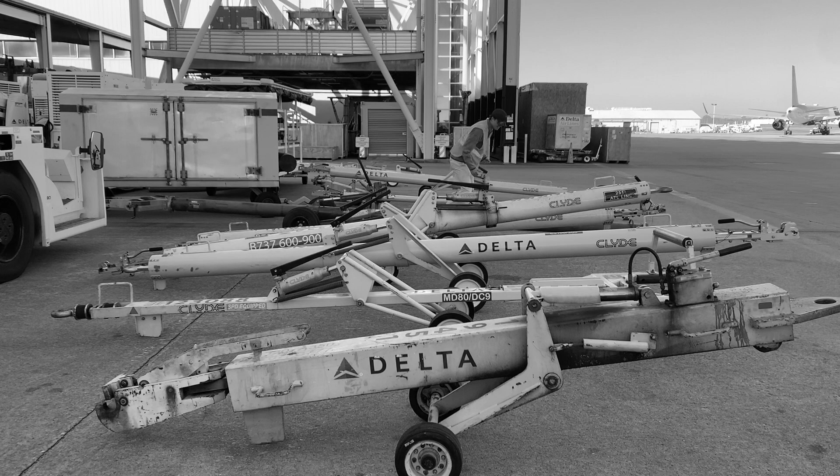Don't you hate it when you just have too many options? Look at how difficult it can be for a Delta operator to find just the right tow bar. Our team, the Total Package, plans to solve this predicament for Delta and their tow bar inventory.

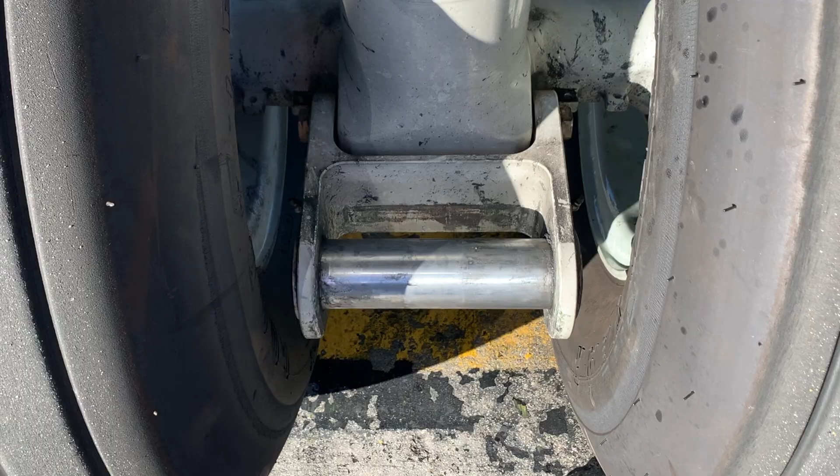While traveling, have you ever wondered how that massive airplane backs out of the terminal? You can thank an aircraft tow bar for helping you on your way. Shown here is the tow lug, located on the majority of Delta's fleet. Delta uses a variety of tow bars to connect to this part of the aircraft and successfully move it away from the gate and onto the runway.

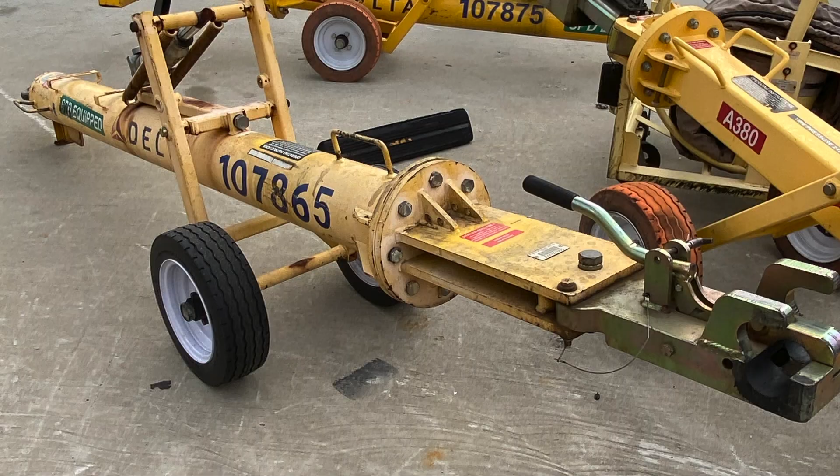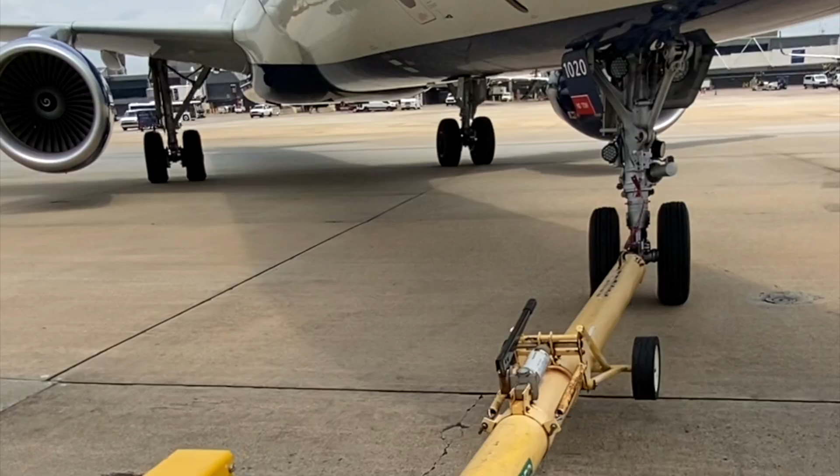Shown here is an example of a tow bar that Delta currently uses. On the left side of the image is the tow bar body, which attaches to a pushback tractor. Here you can see the tow bar head, which attaches to the tow lug on the aircraft. Together, they allow the pushback tractor to push the aircraft onto the runway and towards its destination.

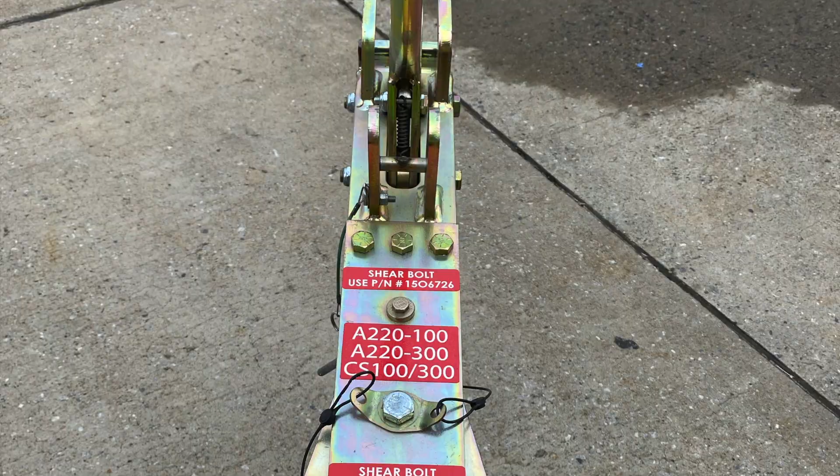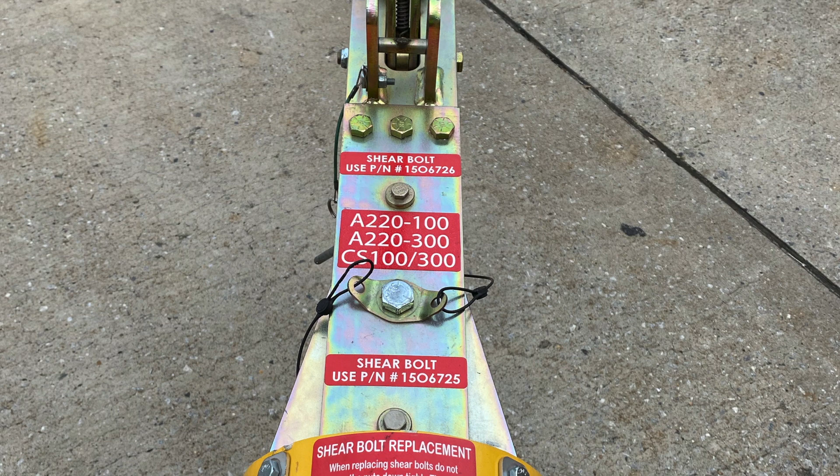At the end of the pushback, the operator disconnects the tow bar head from the lug, and the plane is on its way. One key feature of the tow bar is that it has a safety mechanism to prevent damage to the aircraft. This is currently accomplished by shear pins, which are connected to the tow bar and are designed to break when too much force is applied to the plane.

Because each aircraft model is unique, there are approximately 12 different tow bar styles that the ground support team can choose before pushing the aircraft. This creates confusion, which can lead to an operator choosing the wrong tow bar, which can then cause damage to the plane and delays for the passengers.

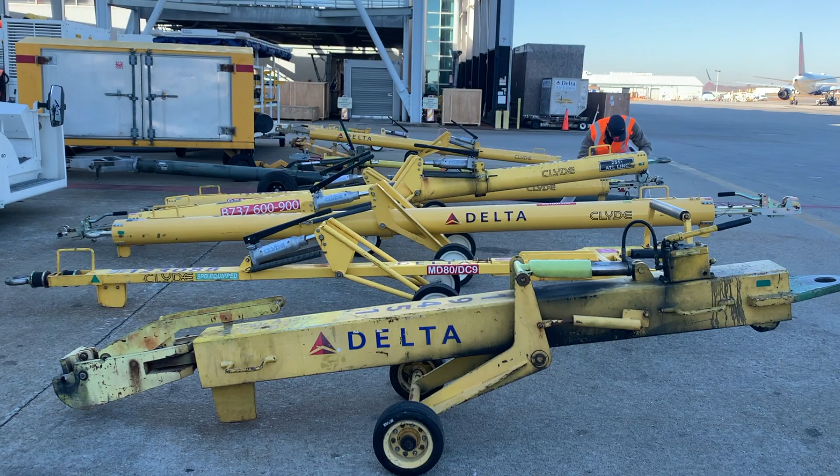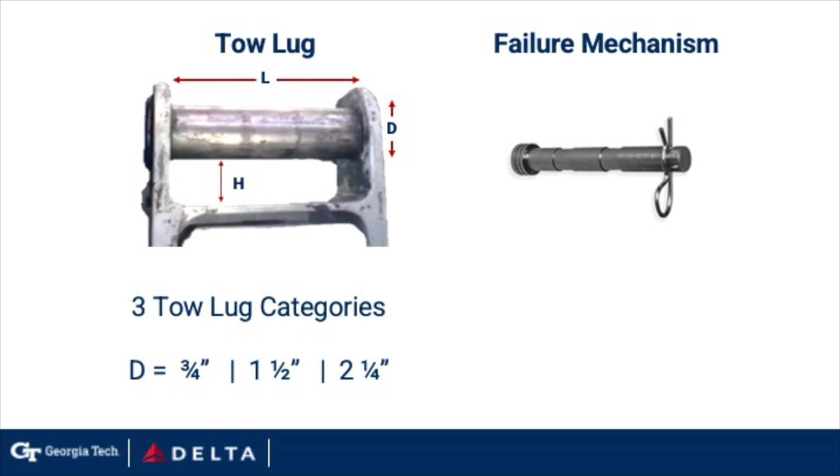Our objective is to design a universal tow bar head attachment that can be used to tow various aircraft and fail safely. The two key challenges of this problem are that the tow bar must connect to 3 different tow lug sizes and must account for 4 different failure loads.

When attaching the tow bar to the aircraft, the tow bar head is first placed onto the tow lug. After the design naturally locates the lug for a secure fit, the operator then positions the corresponding slider beneath the tow lug and locks the mechanism using the handle.

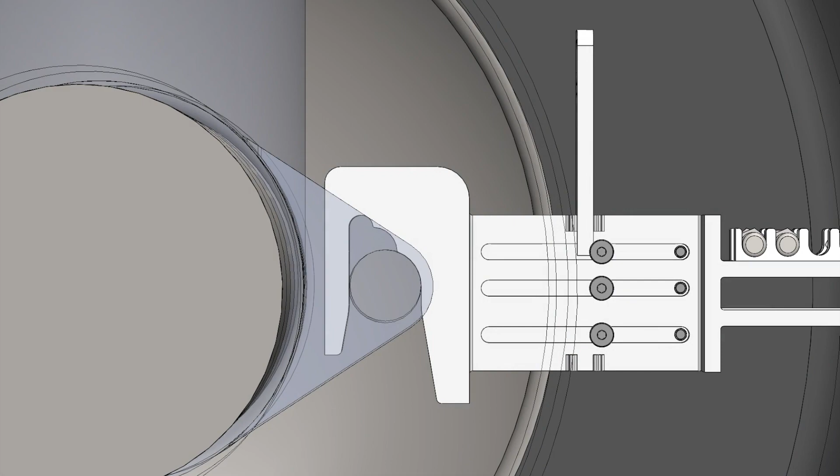Once the pushback is complete, the handle is removed, the slider is then retracted, and the tow bar head is removed from the tow lug.

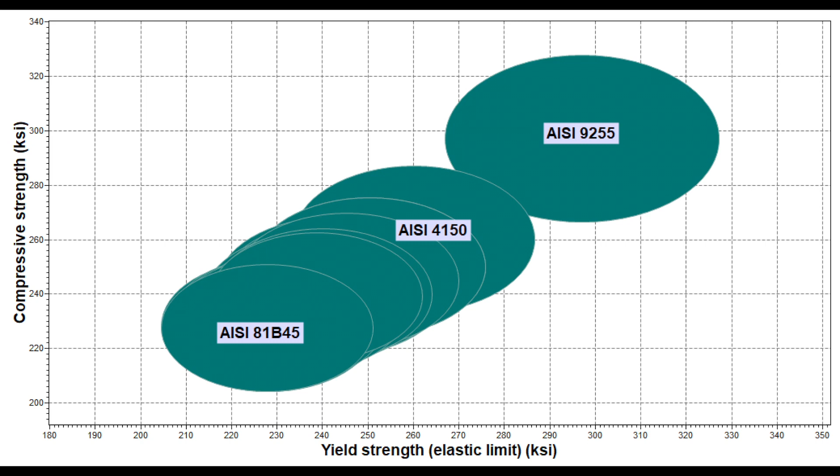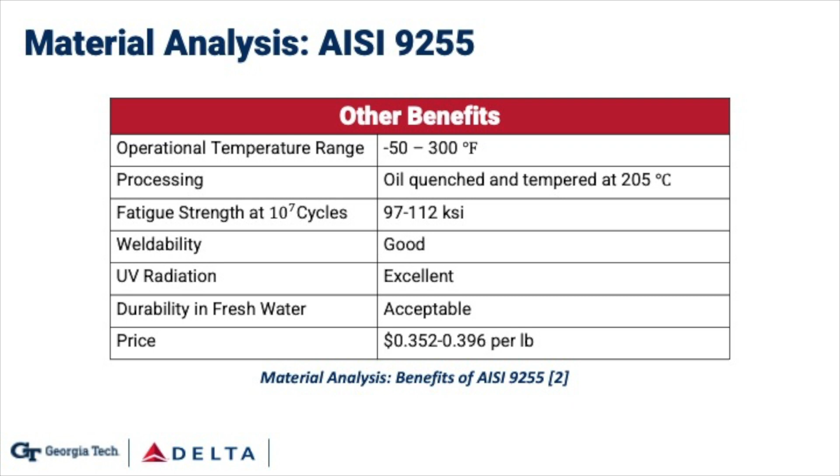Produced out of AISI 9255, the design will have a high yield strength and high hardness to allow the tow bar head to protect against failure from large forces and everyday wear and tear. This material is also weatherproof, capable of operating in extreme cold and heat, as well as rain, sleet, and snow.

Using the von Mises stress analysis, the design was then analyzed at 37,000 pounds, which is greater than the minimum force required to push the largest aircraft. After analyzing each tow lug scenario, the design demonstrated a minimum factor of safety of 1.27, which is sufficient to safely tow each aircraft.

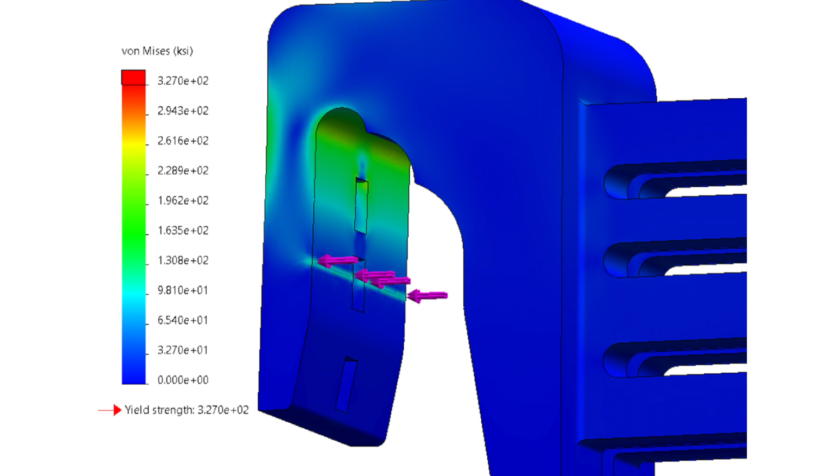From the analysis came our prototype, which was built with plywood to perform a fit check and validate design tolerances. To perform this fit check, the prototype was taken to Hartsfield-Jackson Airport, and with the help of the Delta Ground Support Equipment team, it was attached to various tow lugs.

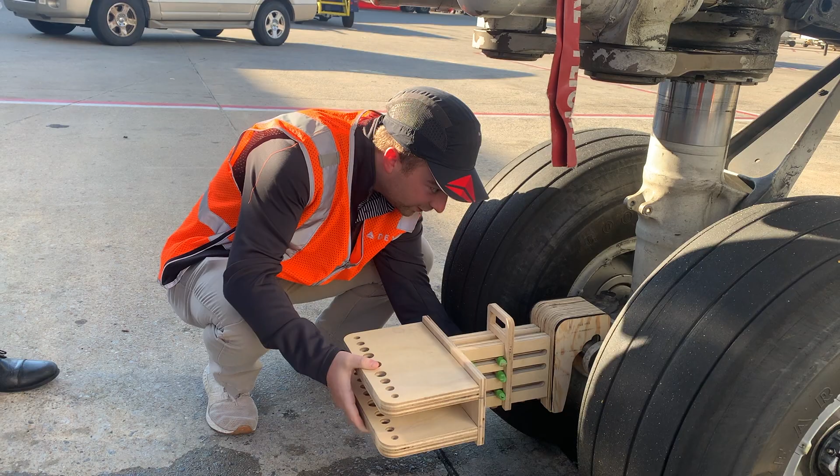During this process, each tow lug setting was tested on its corresponding lug size to evaluate its functionality. The sliding mechanism was also tested for ease of operation and tow lug security. Now look at that secure connection.

Having performed a fit check on all 3 lug sizes, the prototype validated our design and design tolerances to fit every tow lug.

Moving forward, the next steps should be to create a full tow bar head from our selected material, AISI 9255, to perform the full-scale force testing of the tow bar jaw and shear pins. Should the design pass all force testing, the tow bar head is ready for the next phase of product development and one step closer to transforming the pushback experience.

With this universal tow bar head, the ground support experience will become simpler, safer, and more efficient.